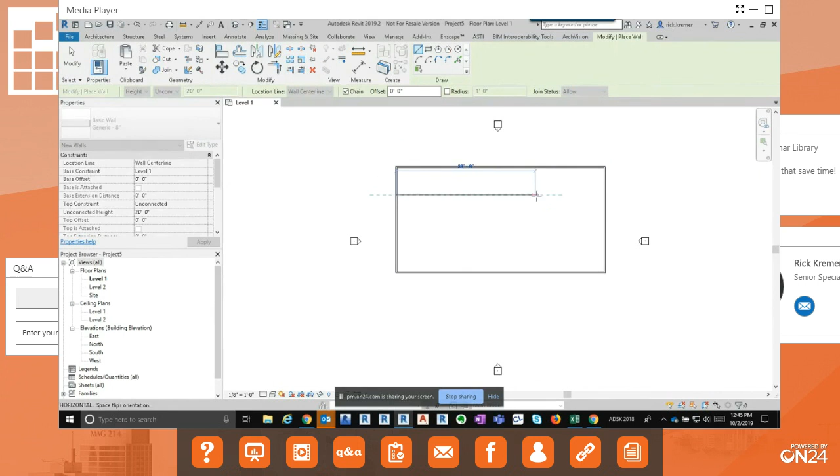I'm going to do a building over here, create some rooms, doors, and things of that nature. I'm going to show you how easy and fun this is. Your kids are going to want to do it. Everyone is going to be jealous that you're going to be able to do everything here as quickly as we are going to show.

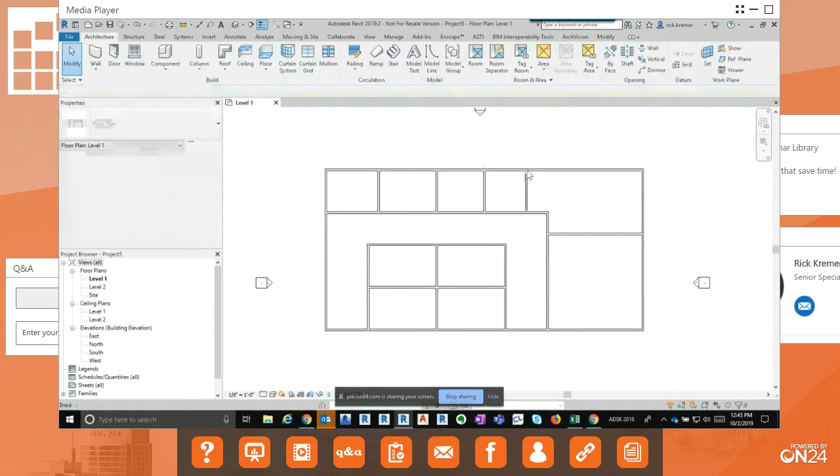So over here, I have a simple project, and I'm going to go through and add rooms. I'm going to place my rooms automatically, and just like that. Okay, so I have these rooms, and you can tell this room numbering is not exactly what I want. If you're an architect, you know you're going to start at the first floor, and these are going to be room 100, usually starting with my corridor at 100 and going around.

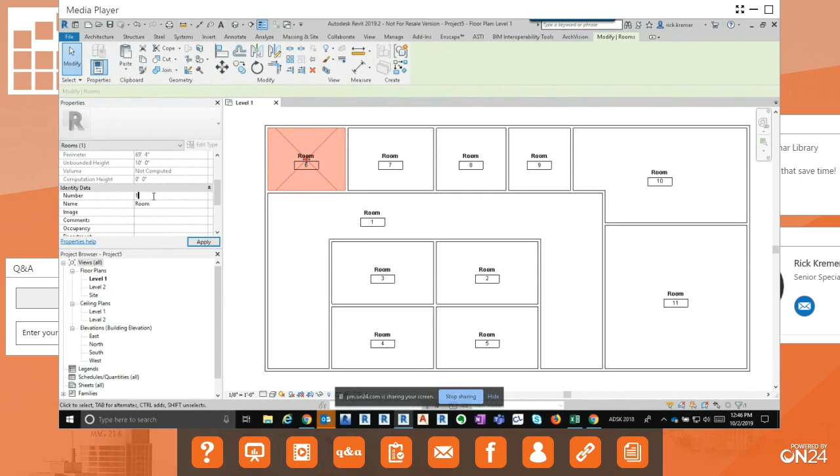Normally, if I wanted to go and change these, I have to click on this and type in 1, and then I'm going to get this warning. It's a real pain in the butt.

So let me show you an easy way using our ASTI tools. This is going to save you so much time. Your kids are going to recognize you. You're going to be able to go home on time. It'll be awesome - a life-changing event.

Over here, we're going to go to ASTI, and we're going to start by renumbering our rooms. Starting from the left-hand side, renumber rooms.

And I'm going to start over here with 100. Now, by the way, folks, you can change this to whatever you want. If you were at the second floor, start with 200 or 300, etc. And if you're superstitious, you can skip number 13.

What I'm going to do is simply click on the Start Renumbering tool and simply click and click 101, 102, 103, 4, come on, 5, 6, 7, 8. Whoops, I missed one. I'll have to go back and renumber it. And move this out of the way. And accept. And what I'll do is I'll simply close that.

Now you'll see I messed up over here. This is 106, 107. This is supposed to be 108. No problem. What I'll do is simply go back and renumber the rooms again. I'll start renumbering, and I will start over again. 100, 101, 102, 103, 104, 5, 6, 7, 8, 9, 10.

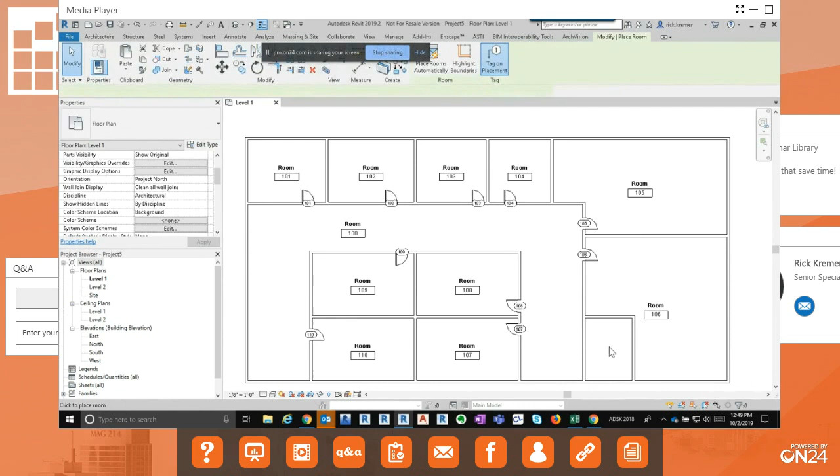And if you're like me, you might have someone who will change the design and all of a sudden add another room over here. And we go over here and we have to add another room. And now I have to go through and basically renumber these again. So without having to go through that whole process again, you get the idea. Over here, renumber rooms, and then renumber the doors is just automatic. So now I can go back easily and change this to 105, 106, make this 107, 108, and so on. And it's very, very easy to do.

Now, you might be wondering, all right, what more could you possibly do? And I'm just going to focus on some of the three things that I really enjoy using, which is the renumber doors, renumber rooms, and then export. And this is the BIM Connect. We talked about the ASTI tools. The BIM Connect over here is going to give me the ability to take a spreadsheet and basically go through and export out the schedule into Excel.

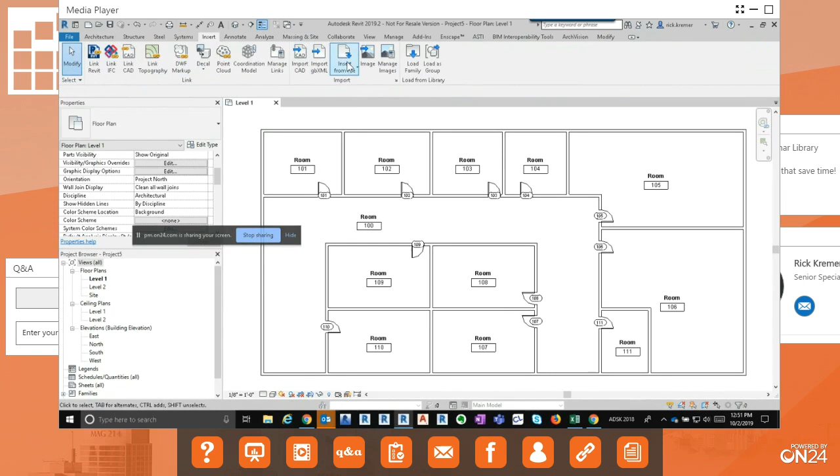So a lot of times you might have someone in your office who's a powerhouse Excel user and not a Revit user, and you want to send that information to them. So what you can do is I'm going to go over here and bring in, for example, this door schedule that I've created from another project. So I'm going to go over here and just bring this in from another project. This is just Revit 101, bringing in schedules from another project. Very cool. This is awesome. So now I have my door schedule over here, and let me just move this.

And so what I want to do is start to fill in this information, but instead of filling it myself, I'm going to give it to someone else to fill out in Excel, to fill in, for example, the hardware set or any information and comments, anything that I want, basically. So let me show you just how easy that is to do.

I'm going to go back over here to my ASTI tools. I'm going to go to export. What I'm going to do is basically select my current view, click next, select doors, and over here, export. Sorry about my screen resolution. This is kind of being blocked right there, and I'm going to export. I'm going to bring this over here to my, let's say, live door test. Live door test. Now on my desktop, and I'm simply going to click on save.

So this is exporting that spreadsheet, and just like that, it opens up Excel. This is awesome. Well, truth be known, I had Excel already minimized, so all it had to do is just open it automatically. And over here, this brings up the spreadsheet. Now, the things that are grayed out do not touch. These are going to be parameter information you don't want to mess with, but anything that's white over here, I can add.